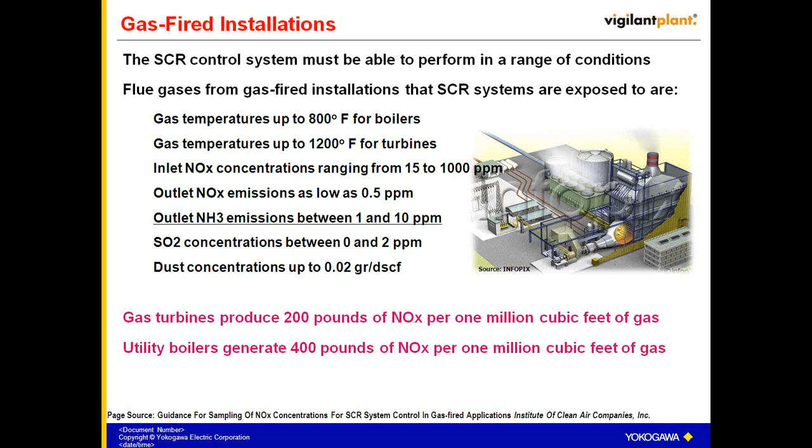We've had success measuring in both gas boilers and gas turbines, in every installation we've installed. The difference is, as I said, there's higher temperatures in gas turbines, so sometimes we have to be very careful when we start. I'll show you where we make the measurements, finding a place to shoot the beam through the exit gas after the SCR. The gas turbine and gas-fired boilers have different things we have to look at regarding the measurement: temperature, geometry, and sometimes the level of NOx or ammonia coming out.

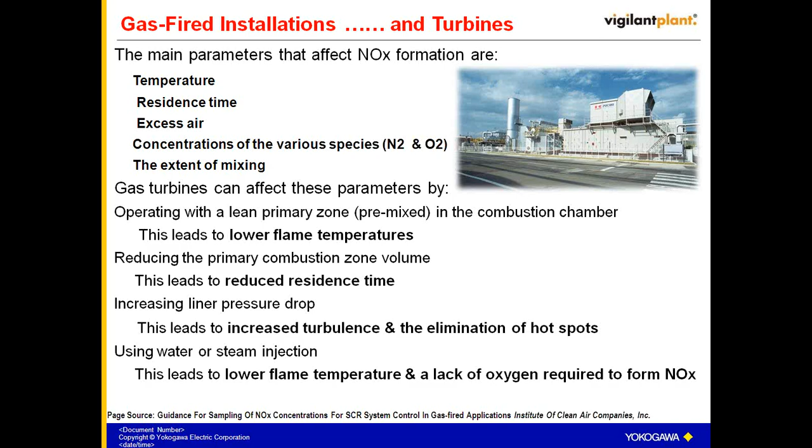The most common that I've seen out in the field is SCR, where there's a catalyst used. Flue gas runs through the catalyst, ammonia—either aqueous or gas—is injected into the flue gas, runs over the catalyst, and the NOx is reduced.

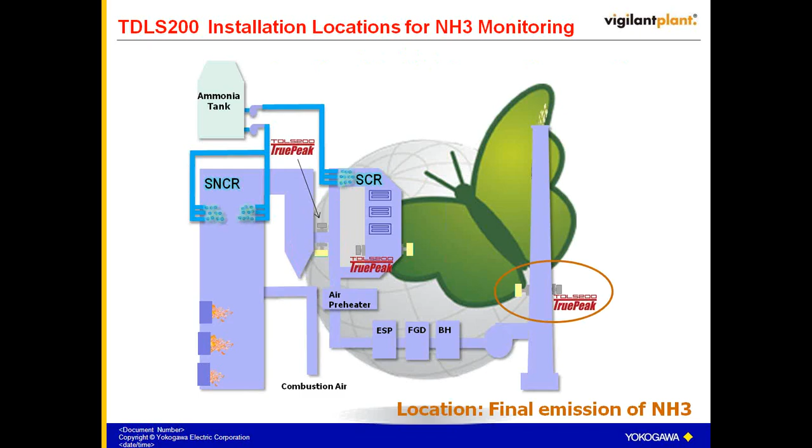I have to thank Ed Deck for this presentation. Yeah, that's interesting.

All right, we'll talk about some of the pros and cons here. As mentioned earlier in some of the presentations, there are multiple sources for ammonia.

You can use ammonia gas, I don't know if anybody does, but it's available. Most are urea or liquid-based aqueous, and the main reactions are fairly simple. Ammonia is present at the temperature, and with or without catalyst, all the NO and NO2 basically go to nitrogen and moisture or water. It just depends on the temperature and how much ammonia is required, depending on which system you use. There were some mentions earlier about safety, using aqueous versus gas.

So to us, it doesn't really matter from a measurement point of view. When it hits the temperature and goes into the mixture, it's going to basically go to ammonia. Whatever is not reacted is going to turn to ammonia, and we'll be able to make that measurement.

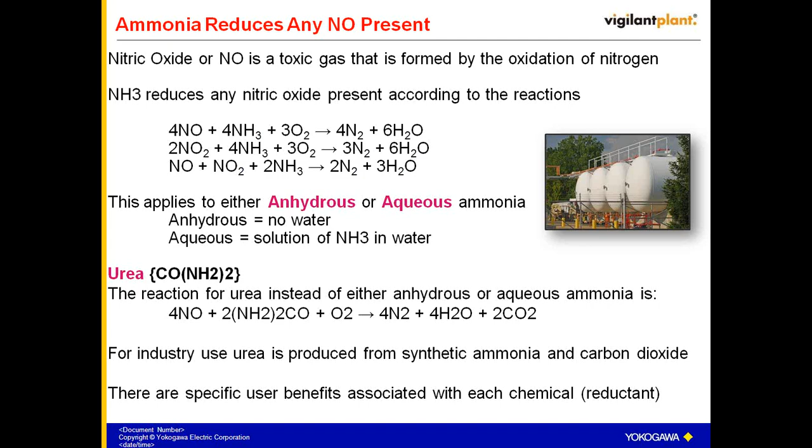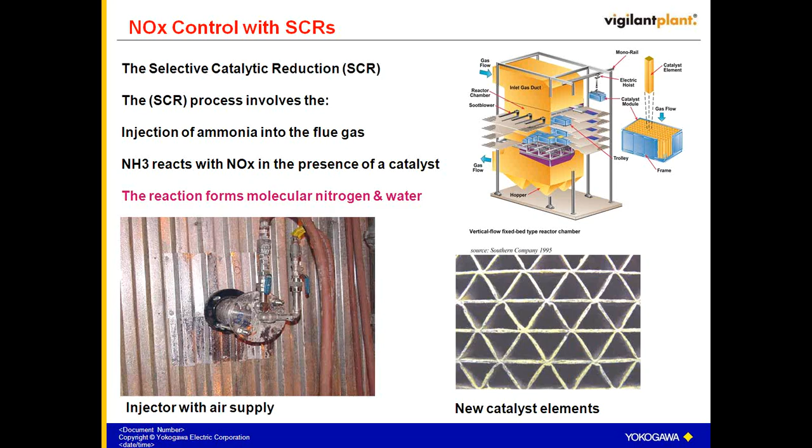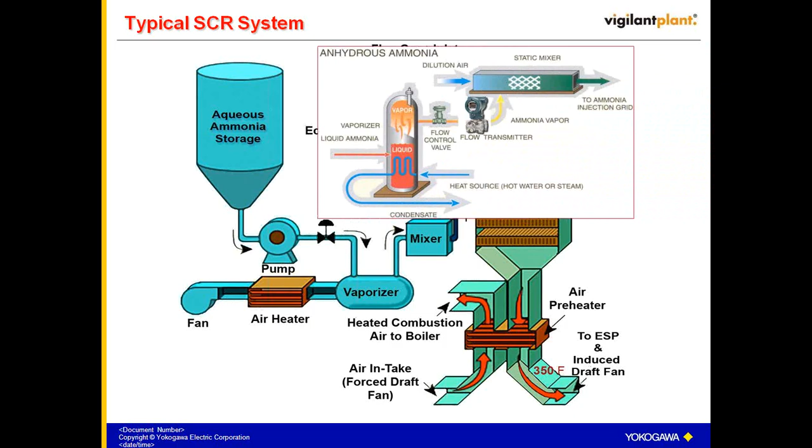Next it's going to pop up a picture of a Yokogawa pressure transmitter, I think. Basically, Yokogawa—I'm here talking about our laser analysis, but we have multiple field instruments as well that can be used on these systems.

One thing that's quite interesting—not everybody's using ammonia slip analyzers, but one of the major benefits of making this slip measurement is that we've seen over the years that as the catalyst is exposed to the flue gas, and there are different contaminants in the flue gas, sulfurs, other heavy elements, metals, they will actually contaminate the catalyst and cause it to become less active or reactive. What you'll see is it takes more ammonia to achieve the same NOx level as the catalyst gets older, and this could be years.

This usually takes years for this decrease to take place, but we've seen in many instances as the catalyst life gets older, you're going to start seeing that injection rate has to be increased, and we see additional slip to keep the NOx at the same level as before. We've had some customers tell us the ammonia slip allows them to predict the end of life of the catalyst, and that's very useful because these catalysts are very expensive and often have very long lead times, and they cannot operate the facility without this unit working properly. Ammonia slip is basically the best indicator to show this curve and we can actually predict the end of life.

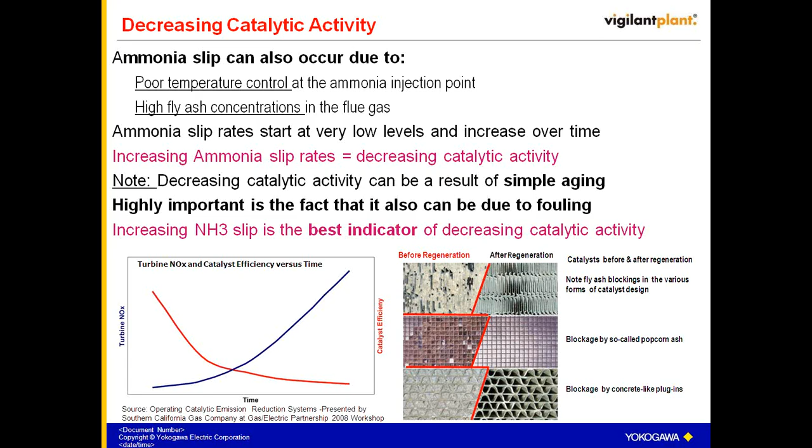Another thing we've noticed, and this is probably more critical in coal-fired but important in any gas-fired system: if you over-inject ammonia, the first thing that happens is increased cost of operation. It may not be significant short-term, but long-term it will be significant.

So we want to make sure we're injecting the right amount of ammonia so we're not wasting it. Another thing is if ammonia mixes with moisture, it can become corrosive, so you can have issues downstream of the SNCR or SCR, with corrosion on all the metal parts. And of course we also don't want excess ammonia going out the stack.

If you have sulfur in your fuel, it's very common to form ammonium sulfate and ammonium bisulfate, which usually is a green crystalline substance that sticks to everything. In coal-fired plants, I've actually seen situations where they can totally plug the preheater and shut the unit down. That's something you want to avoid if you're over-injecting and have high sulfurs.

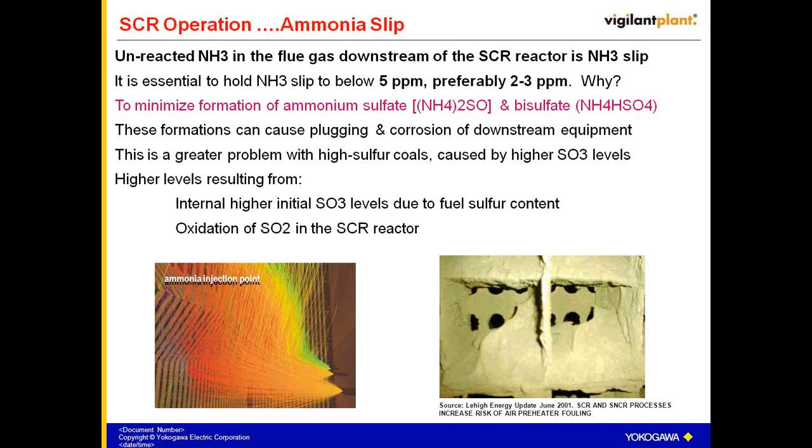But even in gas-fired plants, if you get a non-sweet type gas, you can have these deposits that cause maintenance issues and shorten the life of your asset long term. So using an ammonia slip analyzer will allow you to make sure you have that optimum slip, and you're running the unit where it needs to be run.

One of the difficulties of controlling an SCR is actually getting a good ammonia number and a good NOx number, because especially after the injection of ammonia, when you try to make the measurement of NOx or ammonia extractively, you have to put a probe in the process.

Then you have to pull the gas down the probe, even though it's typically a heated line, and these can often be 50 to 300 feet long depending on where the analyzer shelter is. When you have this situation, you now have NOx and ammonia in a stainless steel tube with a lot of surface area, and the NOx and ammonia continue to react as they go down the sample line to get to the analyzer.

So even if you have an analyzer that can make the measurement, it's not representative of the actual ammonia measurement in the process, and the NOx has reacted as well. As the ammonia level goes up, the problem is compounded because you have more reagent in the sample to measure. Also, on some of these units the geometry is quite big across the duct where you're trying to make the measurement.

The outlet of the SCR or NOx removal system is quite large. I've seen them anywhere from 6 feet across to 50 feet across, and if you only have a single point where you're pulling the gas out of the duct, it's just localized. You don't have a good understanding of what's happening from a stratification point across the duct, and you may have a high reading or a low reading. So controlling it is very difficult if you don't have a good quality number.

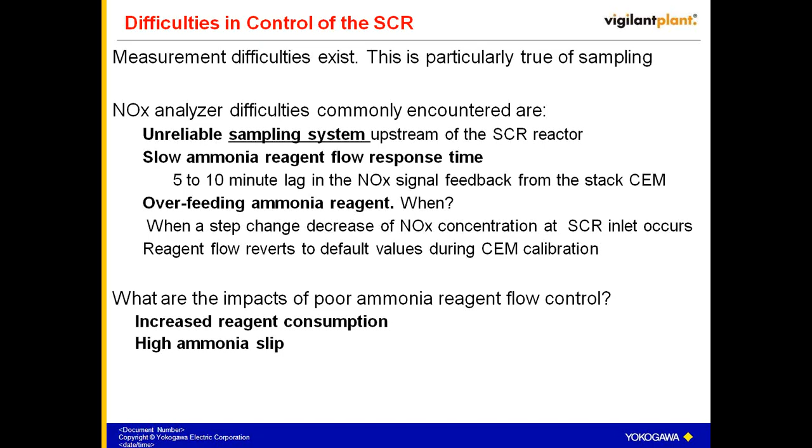So, benefits of actually making an ammonia slip measurement: first of all, regulatory agencies are cracking down on what you're allowed to put out the stack, as we heard this morning. So lower emissions of ammonia go hand in hand with lower NOx. They said 2 parts NOx, 2 parts ammonia this morning, I heard that multiple times. So monitoring the ammonia actually benefits to make sure we have the proper ammonia emissions.

Another thing is if you over-inject, we've seen it where you can have deposits, plugging, and corrosion. Ammonia has an odor in itself. We reduce the reagent cost, it has a cost that adds up over time. Of course there are also process improvements, efficiency, and reduced catalyst cost. This really rolls right into the improvement of catalyst management, as we spoke about earlier. Basically, you can determine the end of life and schedule that outage appropriately.

And another thing, if you really get way out of control and have too much ammonia injection, it can actually form a plume as it goes out the stack. And we know people don't like seeing anything visible coming out of the stack.

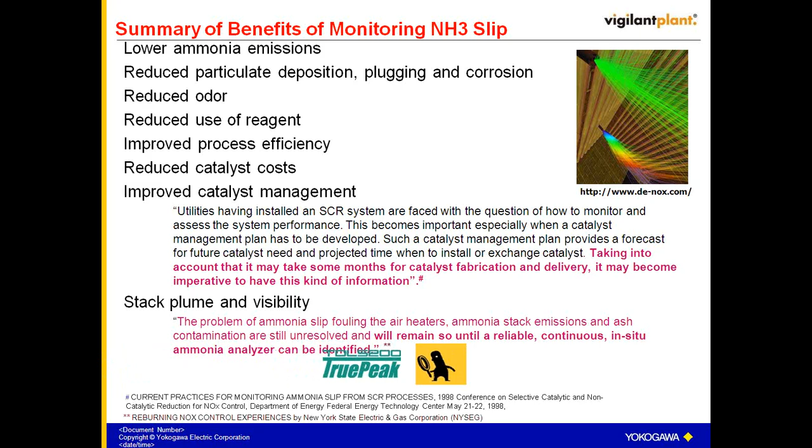So as mentioned earlier, when we go to extractive analyzers, which TDLs make the measurement in the process, traditionally most analytical measurements are made extractively. Quite honestly, when it comes to continuous emission monitoring for standard gases of oxygen, CO, CO2, SO2, SO3, those are still made, from a regulatory point of view, at the stack with extractive sample handling conditions and sample lines, and that's what the regulatory agency wants to see. But outside of SO2, SO3, those are not reactive gases, and you're not controlling off of them, so the amount of time it takes to make the measurement is typically acceptable.

But when you look at the ammonia measurement, it's actually a control point, and it can be an emissions point. The TDLs that are out there make measurements in anywhere from 2 to 5 seconds, right in the process with no transport time. So if you go extractively, which is traditionally what you see, you have slow response time. That's an issue with control.

Also, as we mentioned earlier, when you actually pull the sample out, you change it. We change the gas when you go extractively, so it's very hard to get representative samples, especially with reactive gases. Leaving it in the process helps with that. And when you take the sample out, even with gas-fired, if you have any sulfurs or anything that's not clean, you have all of the components of the sample system to deal with, filters and chillers, and we don't have any of that. That really helps with the long-term cost of ownership based on maintenance, and also the quality of the measurement using TDL versus traditional technologies.

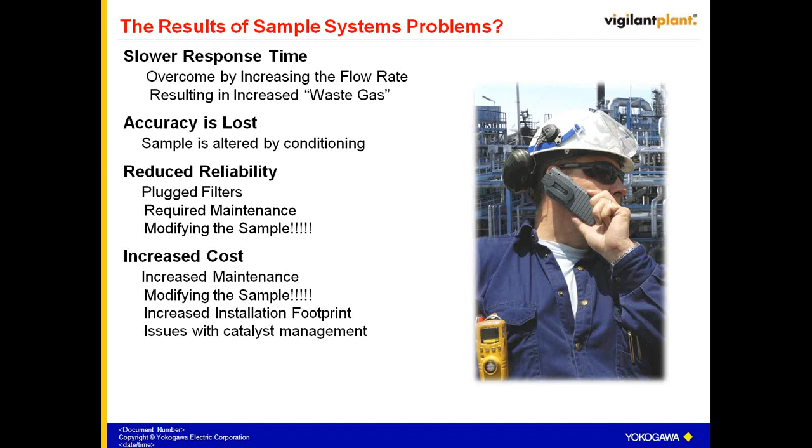Another thing we've had the privilege of participating in over the last year was EPRI. They've done several studies on ammonia slip, even starting back in the mid-1990s. Recently in 2012 they finished a study specifically for ammonia slip, and they looked at multiple manufacturers. If you are a member of EPRI, I don't have the document number with me, I apologize, but we can find it, and you have access to that.

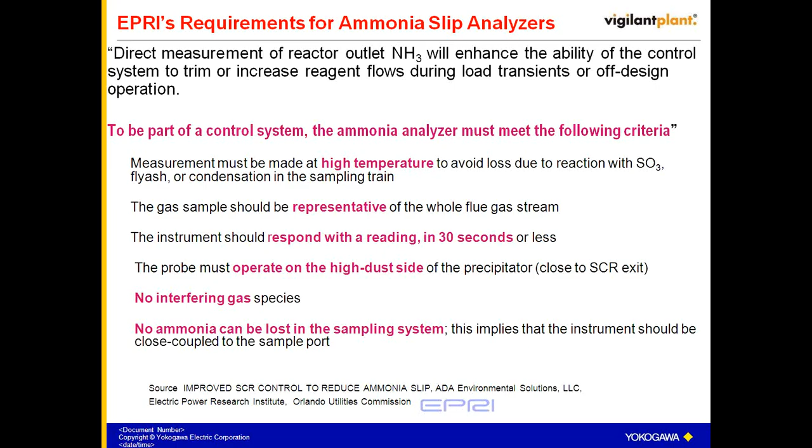They went through and defined their test method and test apparatus, and we were allowed to send a technical person while they did the testing to make sure the analyzer was set up properly, and witnessed the testing. They wrote a very nice report and published all the results. Yokogawa had a very positive showing, and the results are very good for Yokogawa as far as accuracy, what temperatures the measurement was made at, and all the conditions. I'm very happy with the result, and I hope most people in the power industry are members of EPRI and have access to that document. It will compare other manufacturers to Yokogawa as well.

We'll move on to the analyzer and some brief benefits of the Yokogawa ammonia analyzer, which is the Yokogawa TruePeak TDLS 200.

What's very nice about this is it's very precise to ammonia. We know the only thing that's even close to the measurement is moisture, and we can measure and correct for that. We do not have any sampling. The maintenance is very low as long as it's installed properly and we maintain the proper window purges. When set up and installed, the process does not come in contact with the analyzer, which removes a lot of the maintenance issues, so we have very long life and very long maintenance intervals typically.

We typically say our upper temperature is 1500 degrees C for the whole platform, but specifically for ammonia, we really operate up to around 450 degrees C. We can stretch that to 550, but we need to know ahead of time.

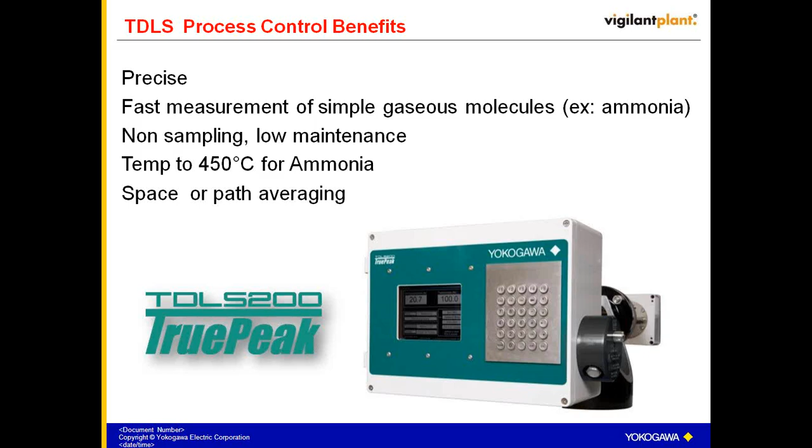So if you have highs and lows, there could be stratification. We're going to give you the average bulk number that's in the process, as opposed to a single localized point that could be very high or very low.

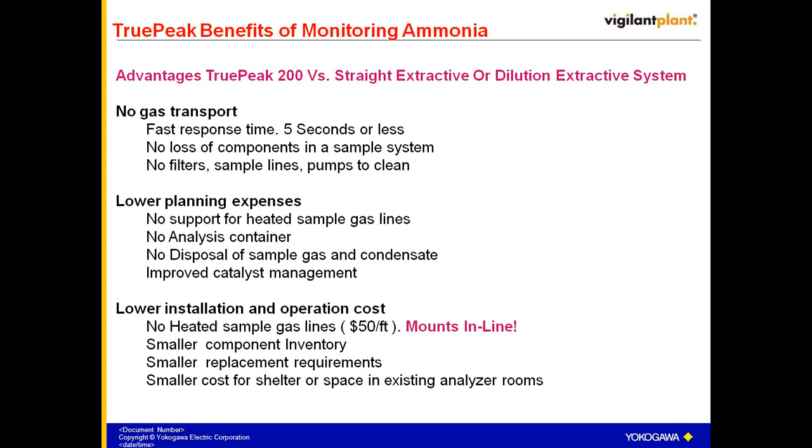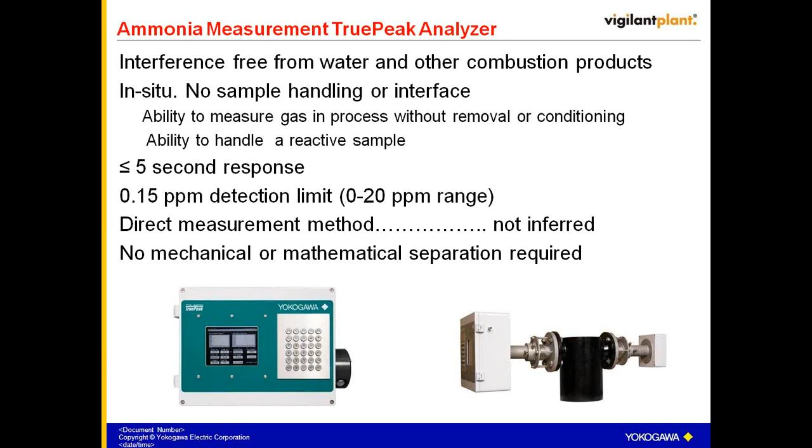All right, some redundancy here, but basically: no transport, fast response, no loss of components in the sample system. That is key for making a reliable, accurate measurement. And we don't have any filters or pumps or sample lines.

We do have some purge lines that we use to purge the windows, to make sure we keep the process off of them, but other than that, it's very clean gases, and it doesn't have anything to do with transporting the sample.

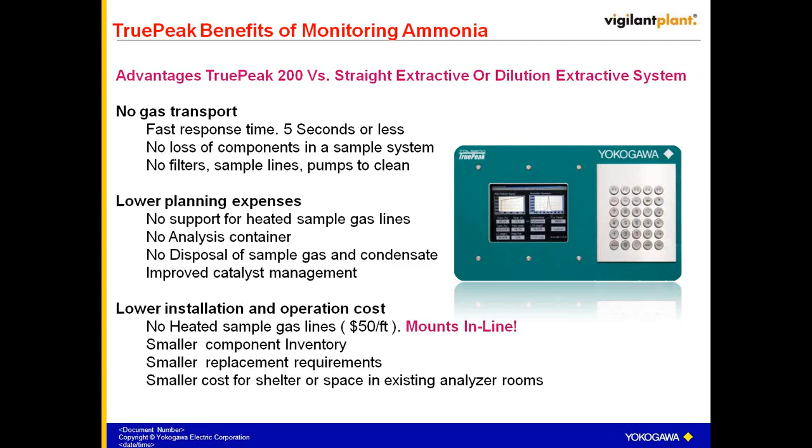Here's a good picture of one installed on the side of a duct. This happens to be a coal plant, but it's similar to what you'd see anywhere. This is the detect side, which is the smaller of the two. This shows the analyzer itself.

Then there's the alignment mechanism, which is attached to the flange—this is very nice. They have a spool piece between the analyzer and the process connection, and blowers to provide purge air to keep the process from contacting the analyzer, and also to keep blockage out of the nozzle so we always have clear line of sight. We'd work with anyone to make sure the application is proper for the fuel you're burning.

This is actually a picture of AEP, here in West Virginia—that's a fairly good size installation, isn't it? Yeah, there are nine of them there. It's a good installation, and they run less than 2 ppm almost continually.

I guess that was one question I had—despite a fairly high particulate loading, how do you overcome that interference? Is it by calibrating for a given level of particulate in the gas?

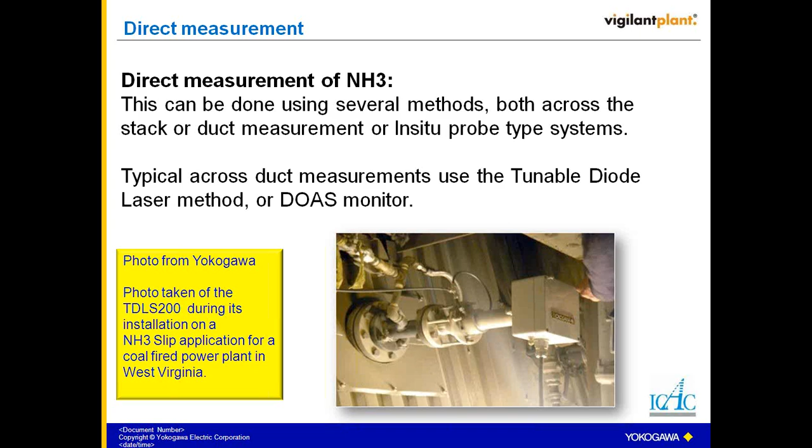Here's an idea—we get this question asked quite a bit: what about alignment? How do you keep the two sides aligned? We have a spec that the nozzles have to be in the same plane, lined up, and within 2 degrees of the center line between the two nozzles. This is a mechanical consideration that has to be taken during installation. Also, in most fired assets the walls aren't very sturdy, so considerations have to be made to ensure the nozzles are firmed up and don't move due to expansion and contraction from temperature changes in the boiler, and also environmental factors—we've had situations where a big rainstorm comes through and the wall moves. So we work with the mechanical group to make sure they understand the requirement.

And what we do is quite interesting—if you're under 18 feet, the beam is a collimated beam, only about 20 millimeters in diameter.

If you go over 18 feet, we diverge the beam so that it spreads out. We don't do that in coal-fired plants because you have to keep the beam very powerful. But with gas-fired, we can spread the beam out because there's no dust consideration. When you spread it out at about 60 feet, the beam is about 0.5 meters, so 20 inches in diameter or so, giving you more tolerance for movement, and we still catch enough of the beam to make the measurement. It's quite a nice feature.

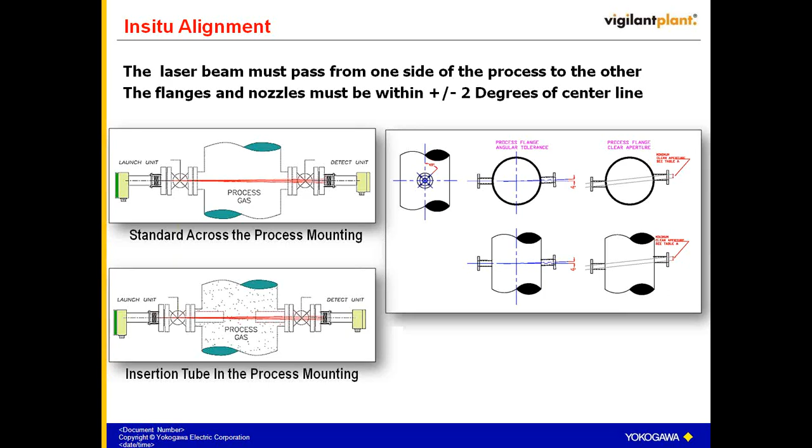Okay, thank my colleague Ed Deck for this slide. Basically, there are more and more TDL technology-based analyzers being used every year in power, petrochemical, and refining—for combustion control and process safety. The technology is being accepted more and more every year, with more people becoming involved. It is a very solid measurement technique.

One thing we run into in America, maybe not so much these days, is that Yokogawa sometimes gets some resistance because the parent company is in Japan. But I'll tell you that this product is built in two locations in the United States, in Newnan, Georgia, right outside of Atlanta, and in Houston, Texas. I do not foresee that changing anytime in the near future. The support comes out of the U.S.—the engineering, the research and development—we handle all of that direction from the U.S., and it was developed right here with the backing of U.S. companies.

We've done in excess of 50 to 60 units in ammonia, and it ranges from gas-fired utility boilers, coal-fired utility boilers, gas-fired boilers and assets, to petrochemical and refining. We've spanned all of that, and we have experience from years ago using a different manufacturer.

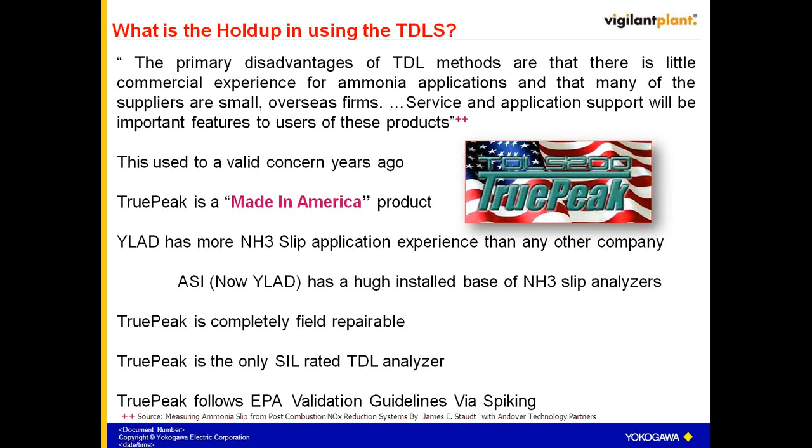We're almost done. I actually hit this slide before, but basically what you need to look for is some things that can help you when thinking about your financial decision to move toward ammonia slip analyzers. If you can determine the end of life of your catalyst and schedule your outage properly, I can't put a dollar amount on that, but somebody in your organization can. I think that's pretty critical.

And then also, when you start getting loss of activity on your catalyst, it's nice to know how much ammonia is actually slipping through—there's a dollar value attached to that. And then, of course, you've got to make sure you're meeting your NOx reduction requirements as well.

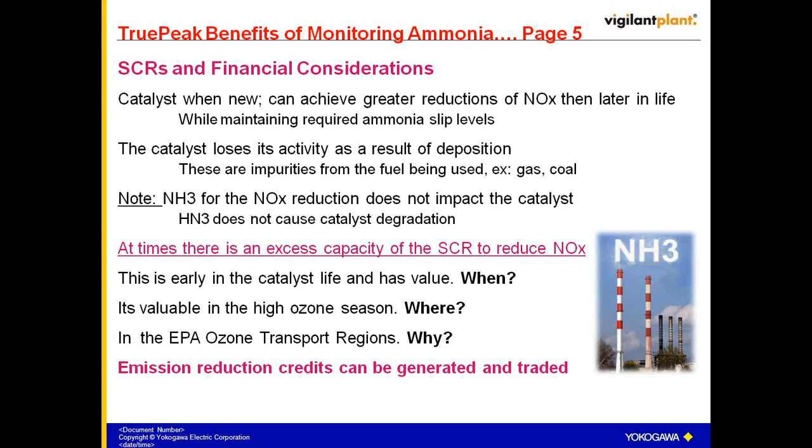So basically, Yokogawa has a very good offering for TDLS for making ammonia measurements, and there's multiple reasons in multiple places depending on your applications. We have some pretty good references in the field, and we have good experience as well. So Bob, that's all I have today.

Yeah, I had a couple questions. One, this moisture interference, you're saying you can adjust for it. Does this mean that you should try to seek exceptions, which I believe some monitor companies have done in the past for certain things, where a particular agency would allow, say, an in-situ measurement more appropriately if you could demonstrate accurate moisture compensation?

Yeah. Okay, so moisture doesn't interfere with ammonia unless we get to lower temperatures, and where the SCRs operate, the temperatures are above that point. So when we make a measurement of ammonia after SCR, SNCR, there is no overlap, so there is no moisture interference. But what I was saying is that when you get to regulatory agencies, today the way most permits are written, the measurements of O2, CO, CO2, NOx, SOx are written to where it's a dry measurement, where the moisture, the condensables, have been removed, basically at a dew point of 4 degrees C.